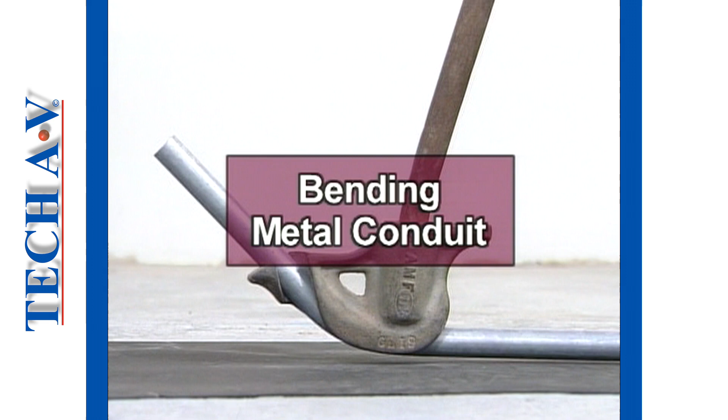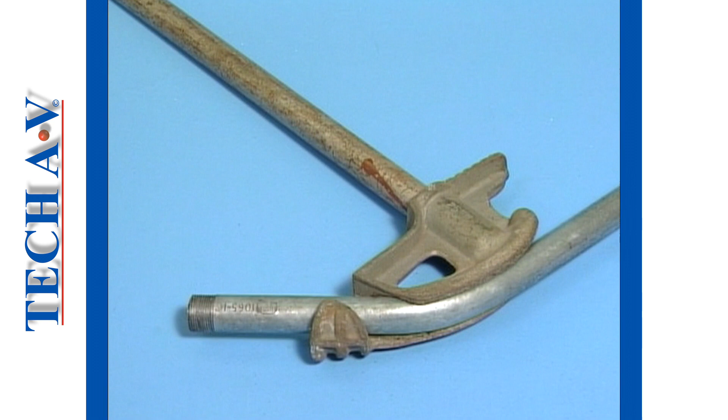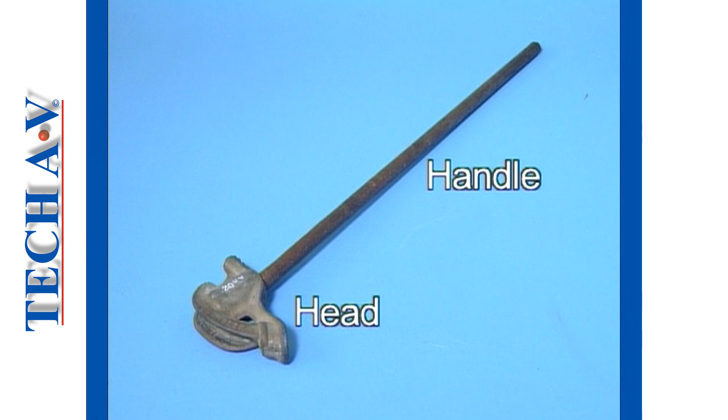Welcome back as we next look at the methods used to create bends in metal conduit. Unlike PVC, which can literally be bent by hand, metal conduit has to be bent using a specially constructed tool known simply as a conduit bender. The two main sections are the handle and the head. The head consists of the hooked lip, the slot, the grooved head, which creates the bend, and the heel.

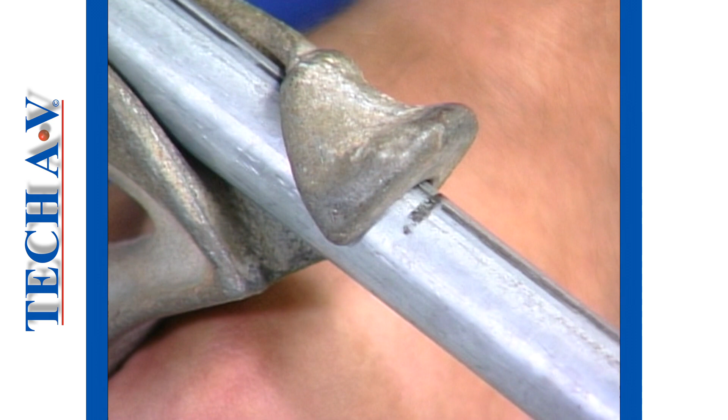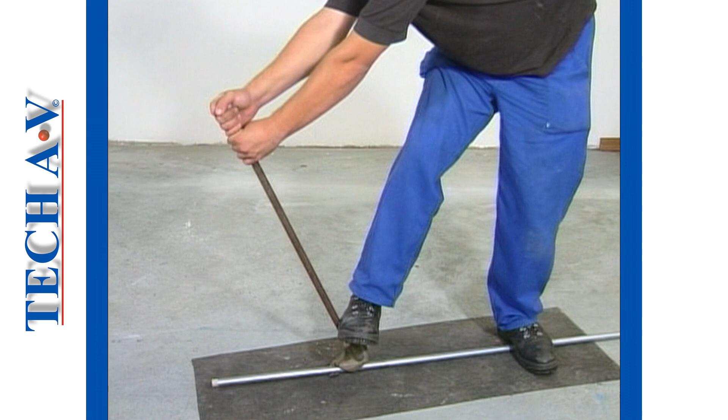Bending of metal conduit is an acquired skill that comes with much practice. A few tips will help you to master this skill. The traditional method of bending is to place the work onto the ground. A rubber mat will help prevent the work from slipping around. Pressure is maintained with your foot upon the heel. The handle is pulled steadily but firmly. Conduit is tough, so you will require considerable force to pull the handle.

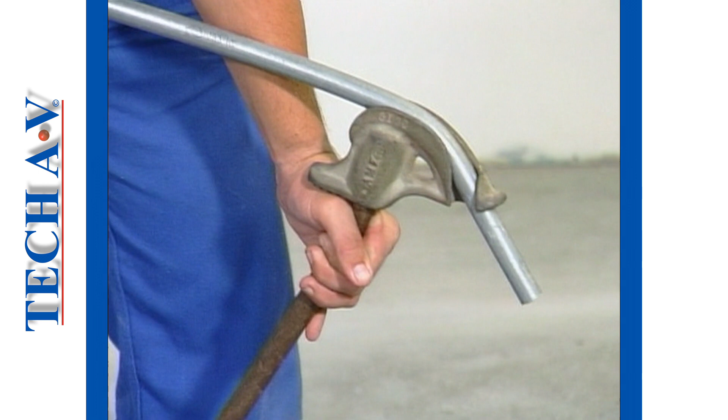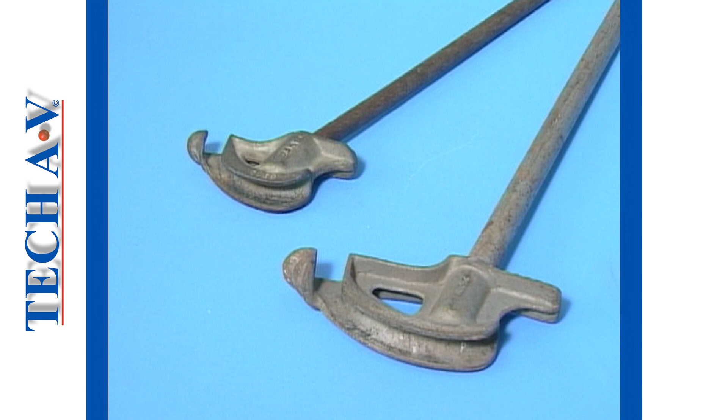Where it is not possible to place the work on the ground, the bender can be used in an inverted position. The important factor here is to make sure that the bender is well supported and that you keep your hands well away from the bending lip. You will notice that your feet play an important role in the support and balance of all bending operations. Benders are made for different sizes of conduit. We are using the bender designed to accommodate 20 mm conduit.

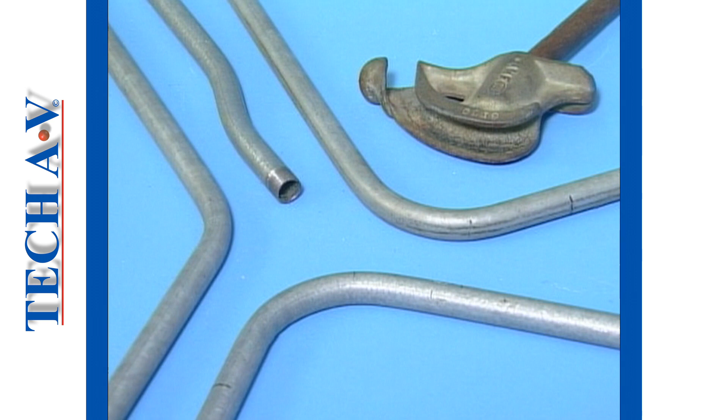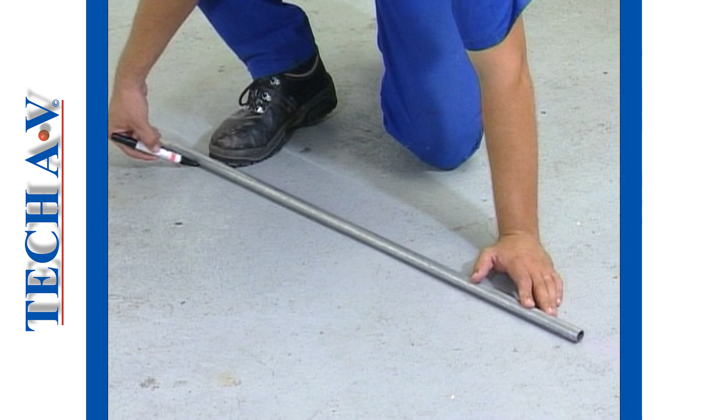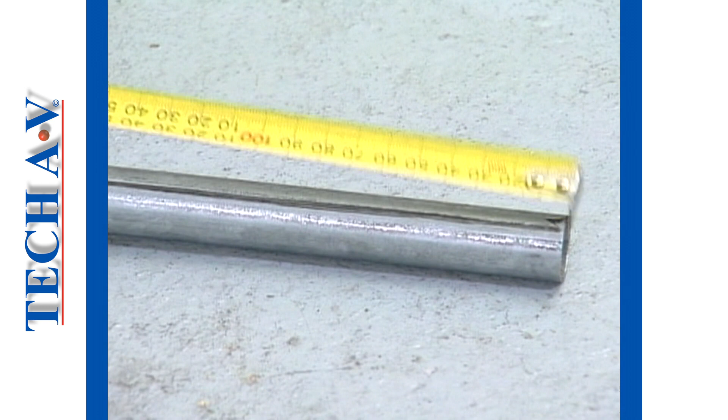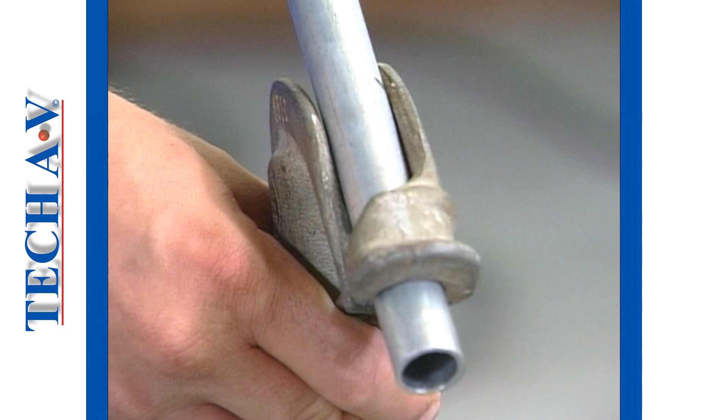Before you use any bender, it is recommended that you test it to determine its bending dimensions. One method is as follows. Obtain a straight offcut of conduit and lay it upon a flat section of the floor. With chalk or a marker pen, draw a line along one edge so that the mark transfers onto the conduit. This will be a reference edge to indicate the top when you place it into the bender. Now measure back and make a reference mark approximately 100 mm from the end. Place the conduit into the bender as shown and position the mark to the lip.

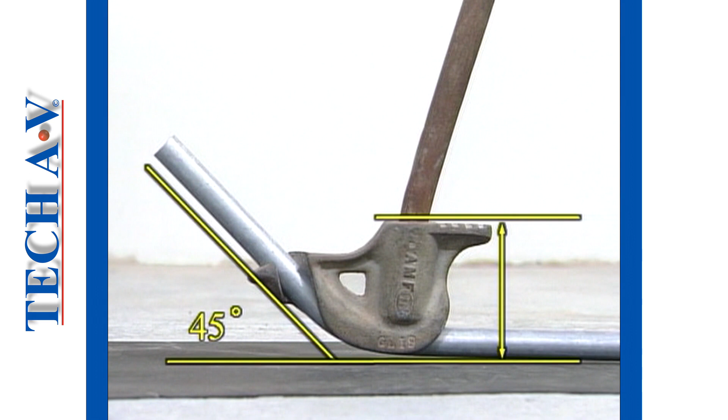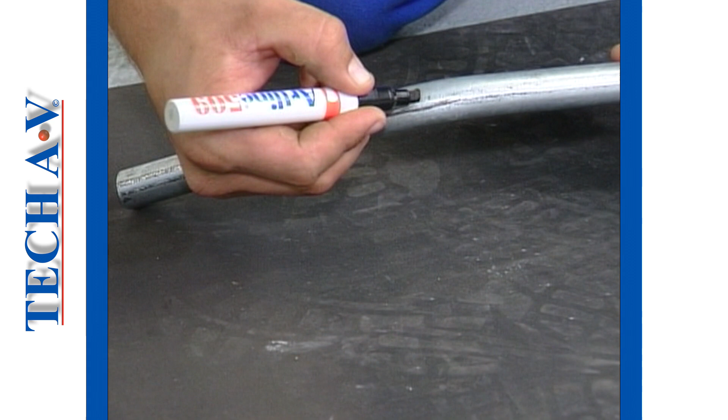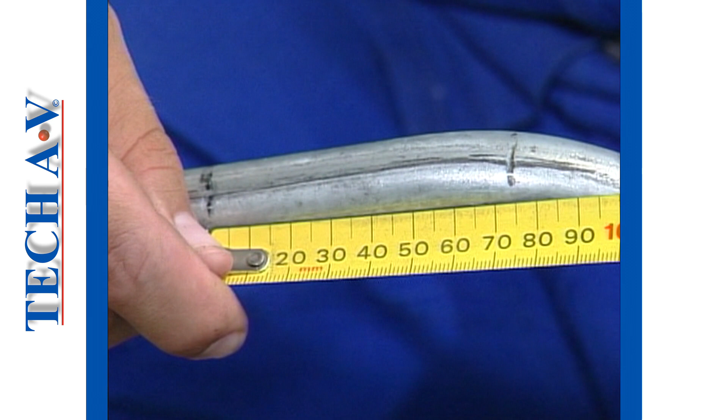To create a 45-degree set or angle, the conduit is bent until the heel is roughly parallel to the ground. A 45-degree tri-square can be used to check the angle. You may have to bend a little more until the angle is correct. Next, a mark is made at the center of the bend. From this mark, we measure the distance to the reference mark. In this example, the distance is 75 mm. This figure is noted and kept for later reference as the 45-degree bending point.

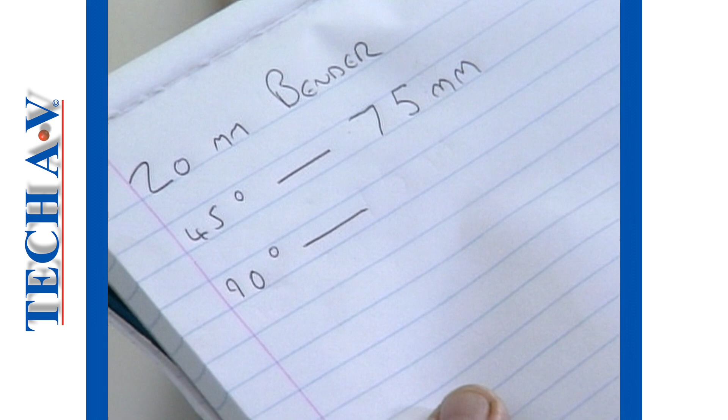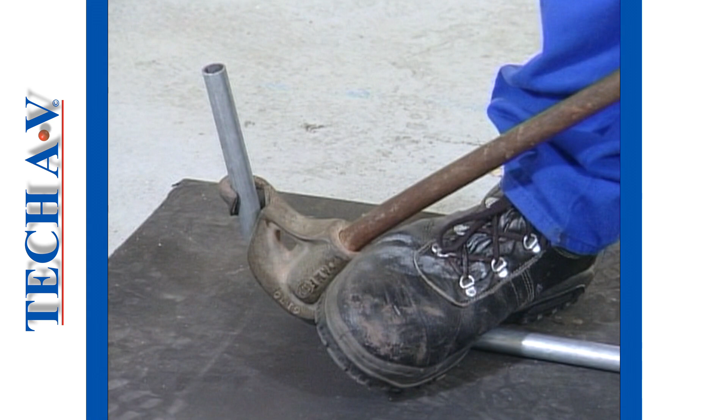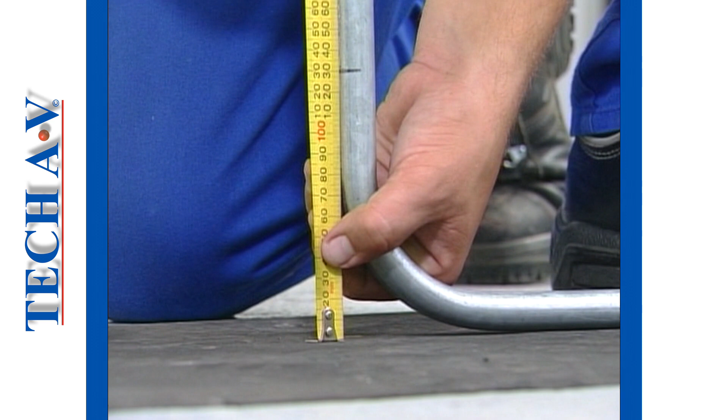Now we'll create a 90-degree bend. This is made by trial and check. Note that it is important not to overbend, as it is very difficult to bend back. Rather make small, progressive bends until you achieve 90 degrees according to a square. A measurement is now taken from the level ground up to the original reference mark. In this case, the figure is 130 mm. This is recorded as the 90-degree bending point. We now have the references of this particular bender in order to maintain accuracy when bending to a profile.

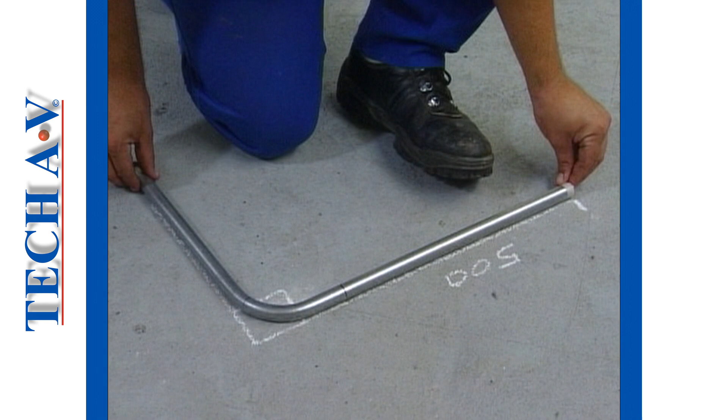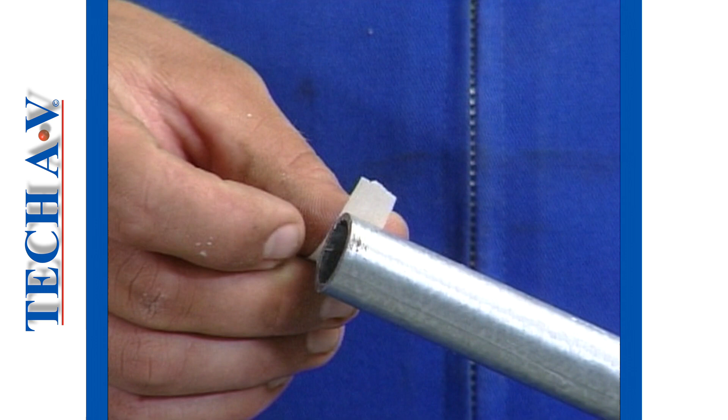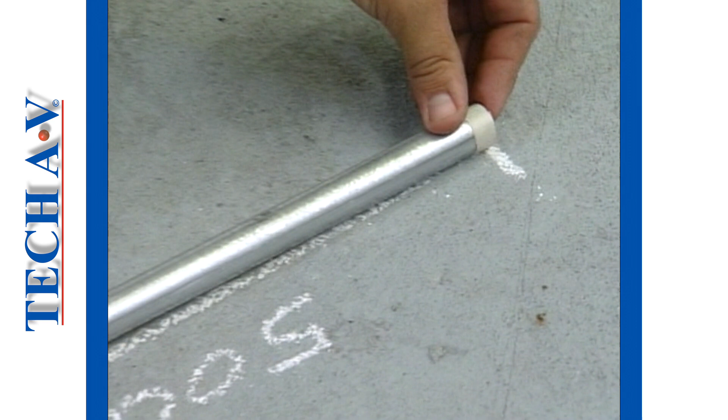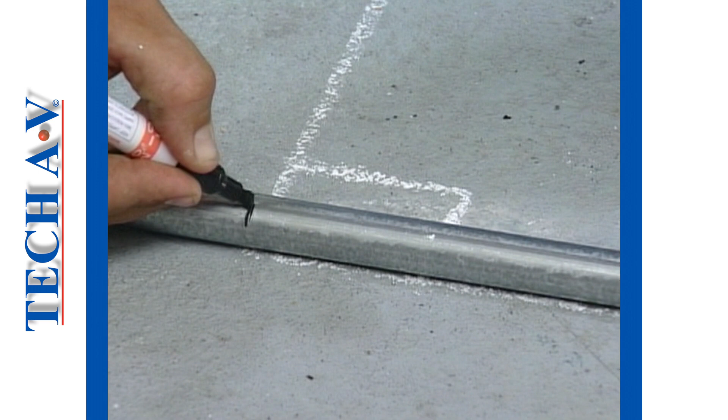Let's see how to make an accurate bend using this information. As an example, let us create a section where a 90-degree bend must be made exactly 500 mm from one end. We begin by placing some tape onto one end of the conduit. This will be our reference end for measuring and bending, as you will see. The conduit is placed over the profile with the reference end on the end of the 500 mm leg. The corner position is then marked. From this mark, we measure back, toward the taped reference edge, 130 millimeters, which is the figure for a 90-degree bend with our bender.

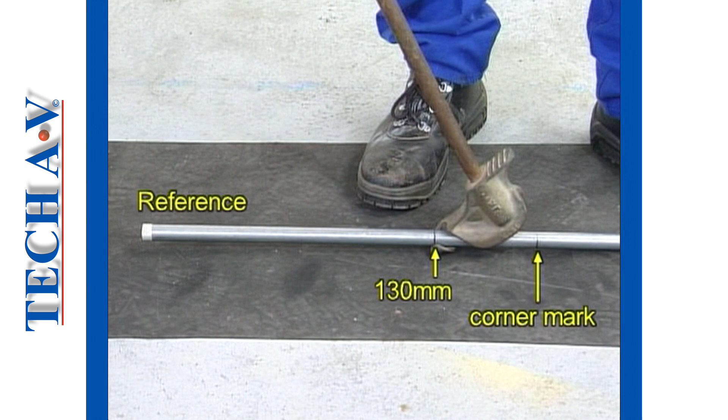Place the conduit into the bender. Note where the referenced or taped end is. Slip the conduit in until the 130 mark aligns to the lip. The bend is now made to 90 degrees. This you will want to check using a square. When we check our conduit upon the profile, you will see that it is right on the line. The bending of metal conduit, as earlier mentioned, is a skill that can only be acquired through practice.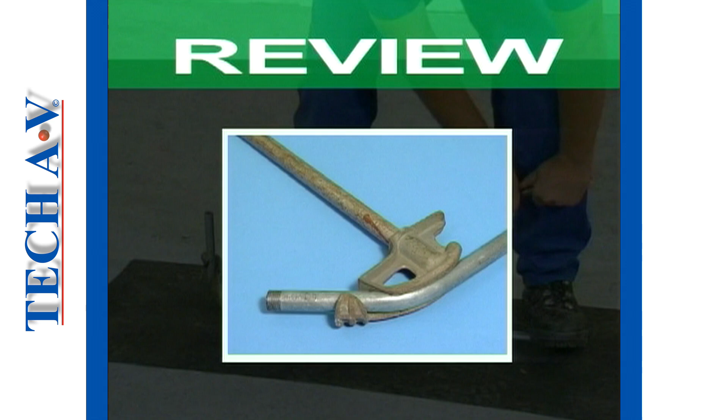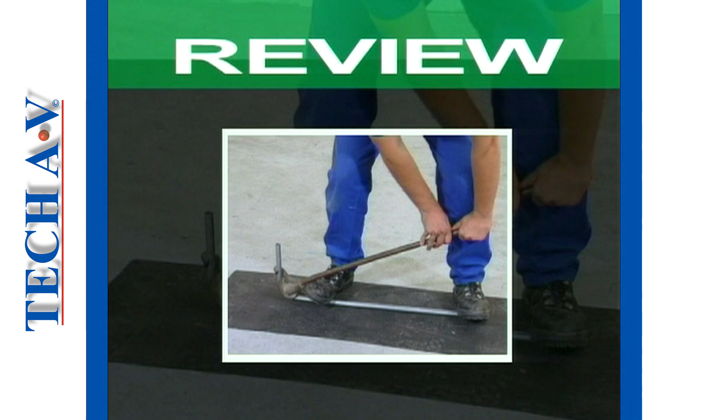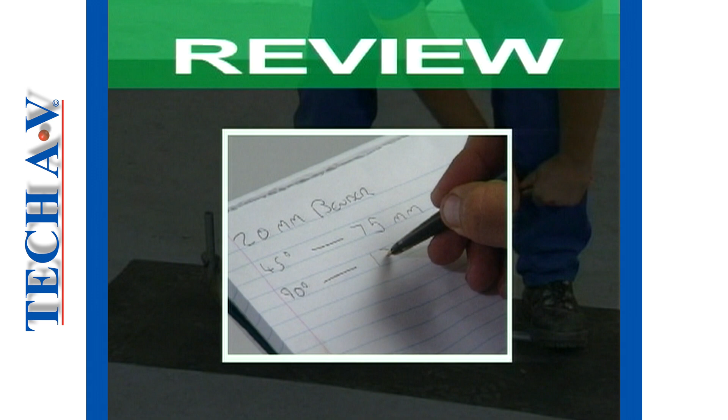What did we learn in this section of this program? We learnt that metal conduit must be bent using a special conduit bender. Benders are available according to the various standard size or diameter of conduit. We learnt that the use of a rubber mat will help to prevent the work from slipping. When bending, we must keep our body weight upon the bender and pull on the handle steadily. We then learnt that each bender can be checked as to its bending dimensions and that we can produce accurate bends to a given profile using this information. After the break, we shall look at making a typical bend.